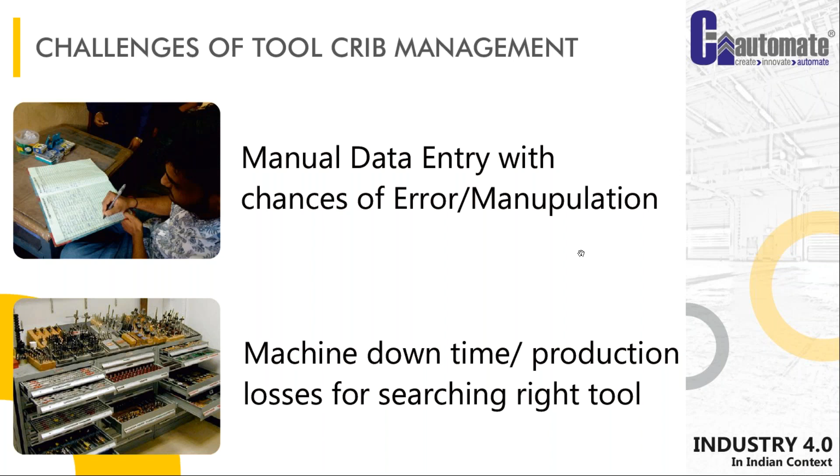The challenges of tool crib management, as we say, typically include manual data entry with chance of error and manipulation, machine downtime, and production losses from searching for the right tools. We come across this day to day—misplacement, theft of inserts and tools, unaccountability of used tools and inserts. It's almost like a second sale that usually happens. There's also tracking of used and overused inserts or tools. Today we are aware there's huge potential for reuse of inserts, but because we don't have a mechanism in place, typically we ignore this potential for saving a lot of money. Next is tracking of cost centers for each tool against the production done, because this again requires some systematic automatic tool which can capture this data, but we don't have it, and that always creates this challenge.

So usually, what are these challenges demanding? Does this mean we don't have any existing system in place? I don't say that. Every organization, small or big, has a system, but the challenging thing is always sustaining it. So the question becomes: what can help us sustain it? Sometimes we also ask whether defining a new system, considering the present cost-effective utilization of tools available today, will help us go to the next level.

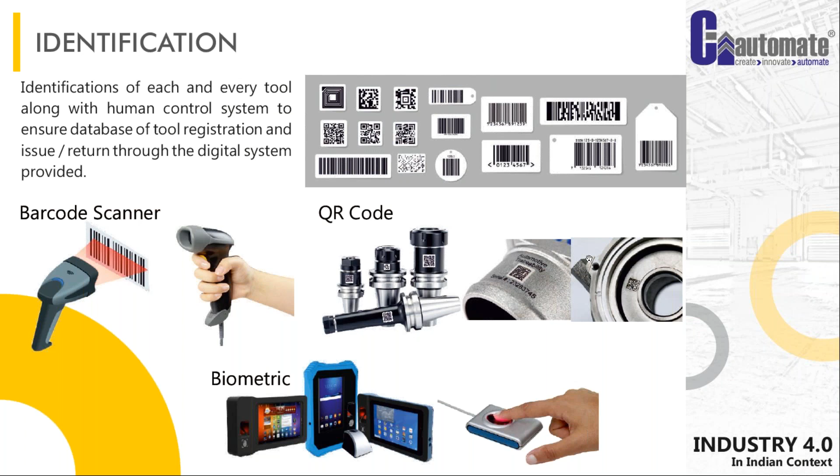And second, knowingly or unknowingly, all our team members down the line in any shop floor, whatever he has studied, he's aware of this scanning, because he's already using something like Paytm, he scans and pays the amount everywhere, so he's already educated for it. And that brings for us a huge potential to bring this technology in house without much consideration. Everyone has a smart mobile. Sometimes our shop floor people use it much better than us. That's what I've actually experienced. So it's just a matter of how we quickly adapt to the technology.

Traceability. This is one area where many of our machining industries, many of us hardcore mechanical people, somehow don't fall easily in love with software, and we then create a problem for ourselves. Here I would rather say that if we are able to have some tools which can be quickly interfaced to these QR codes, RFIDs, or whatever identification tools you call them, I think on that visibility we can have great feedback and bring that kind of accountability, because once we have this traceability, everything can be accounted for.

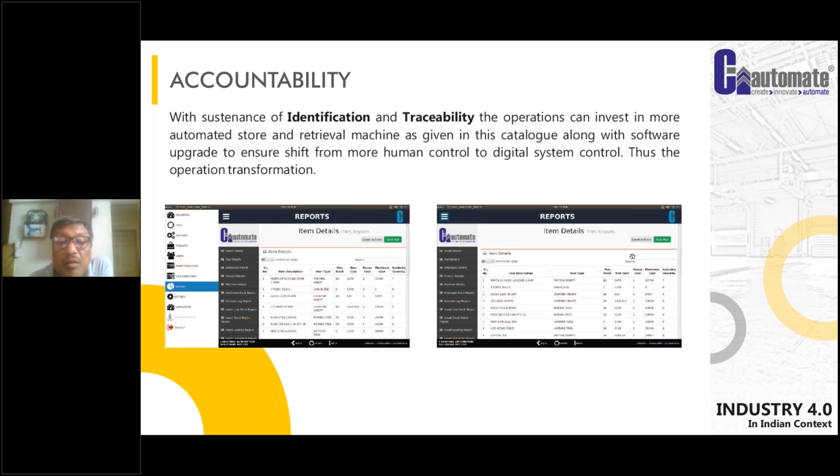So again, for this, our tools definitely give you all the reports, because we have tried to understand the pains of all the customers we have been interacting with, right from the market survey when we started this particular product design. And today we are very happy to see the maturity of our product and the reports, the software user interface that has come out. I really thank all our customers for their feedback on this.

So I would like to start from the simplest of the simplest, something which one can start immediately today, is cutting some barcodes, QR codes, printing, pasting it on the tools. We have these scanners which are readily available in the market. Just get a software tool, definitely which we provide. Of course, if there's someone else, no issues. But get that software tool interfaced with this and just start the use. This is as simple as plug and play.

And today I'm very proud that I will be giving you this free subscription as a trial, wherein you can play with this, wherein this identification, traceability, and accountability with the visibility and accountability software will be on your system. So here I have just shown how various tools kept openly can still be brought, interfaced with the software platform, and just start using it.

Okay, what you may have to best do is maybe have some kind of small fencing to your tools or that particular area, which can help you have a proper flow of the tool from the shop floor to your point of use.

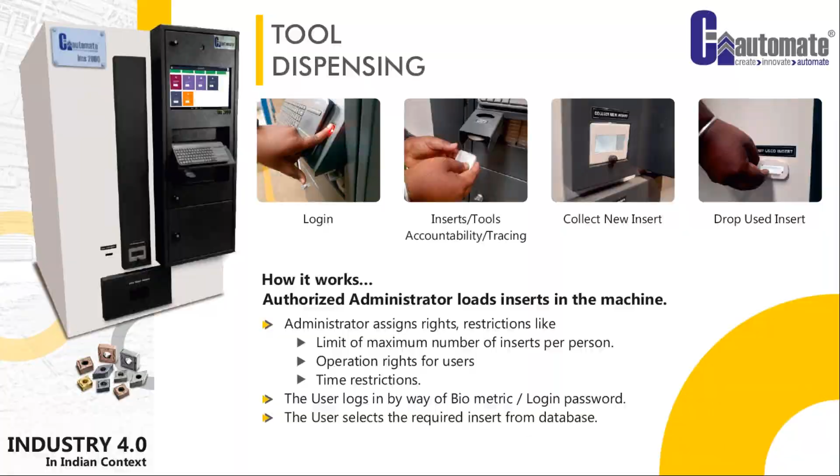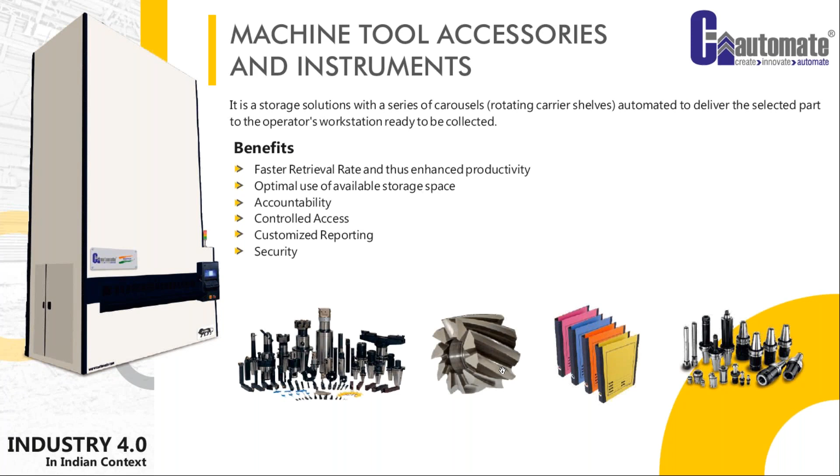And these features are incorporated in all our tools, wherein we speak of IMS, ITMS, where we are also speaking of the tools along with, we are also giving the files, cutters, you name it, you have them here. There's all the reports.

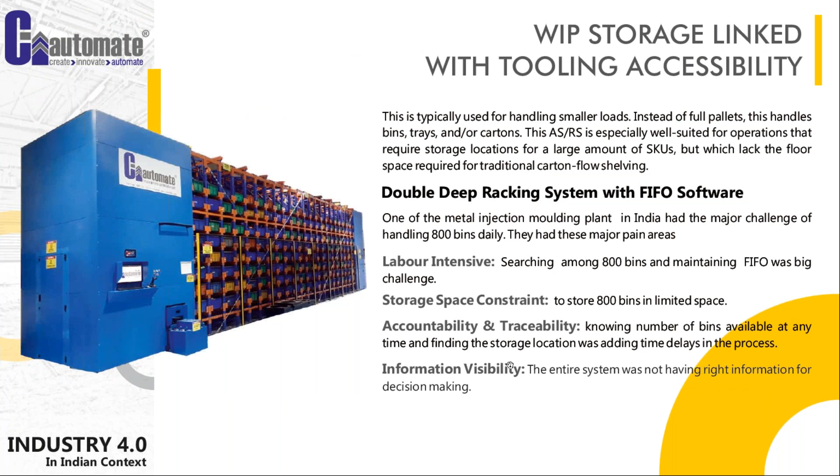What we have further done is we have also integrated the jobs. That is, we are speaking about work in progress jobs, where if you have an arrangement to place the jobs in a kind of automated storage and retrieval system, as soon as the machine calls for a particular job, this job is taken by an AGV. This is one project which we executed for Indo-Yamaha in Bangalore, so that even the workflow is integrated with the tool management system.

This is how we say it as a one-stop, one point solution. You speak of presetter data, machine data, CAD CAM data, ERP data - all this we are connecting on one platform. Our software, which we provide with our machine, gets interfaced to all of these entities or elements to make you feel that you are on a seamless platform.

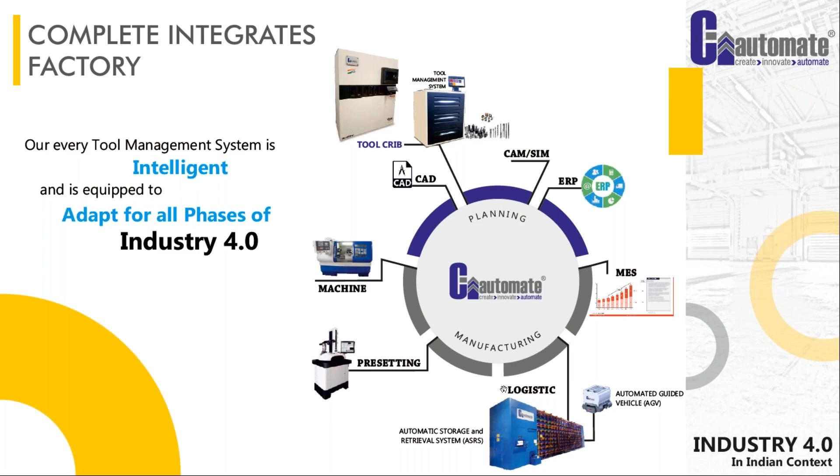So this is what we, as an industry 4.0 one-stop solution for total tool management, are able to do. Going further, this particular product has made us deliver today the complete warehousing solutions, because as we started giving the insert tool management, workflow, job flow management along with storage, we started giving the warehousing solutions, the AGV solutions, and the rail guided vehicle solutions. That's the reason we say we today are a one-stop solution for complete material handling.

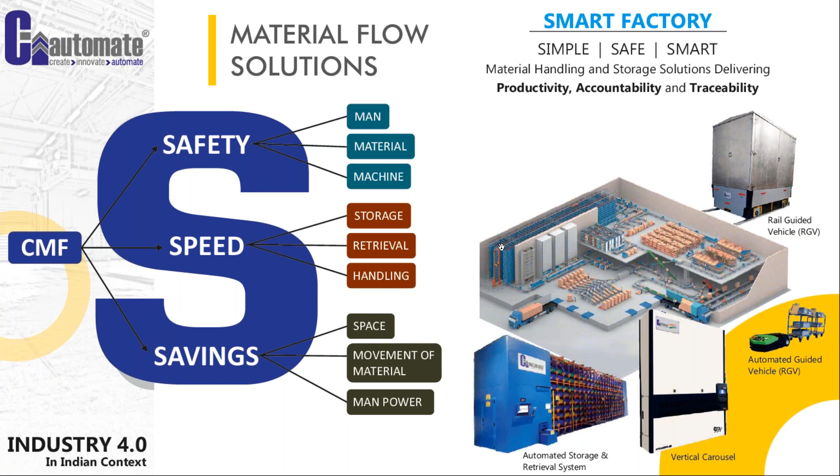Along with traceability, accountability, and visibility, when we speak of maximum profit, information flow and material flow are becoming the key. Unless we integrate, business will not be in control.

And that's where our ERP solutions, which we are calling our Creators Material Flow solutions, bring these features which can be loaded on our systems, on our machines, as well as on your premises, so that it interfaces with your ERP, if you want to pull and push the data in case you have difficulties with the existing ERP systems.

This is how we say total interface to the customer and vendors, planning, scheduling. And we speak of planning, scheduling of the total functions, not just production. We are giving planning, scheduling solutions for marketing, purchase, HR, quality, production, design, stores, accounts, and maintenance, so that the particular activities can be executed as per the plan.

A few companies we start from the production department and then conclude with the total integration of their functions.

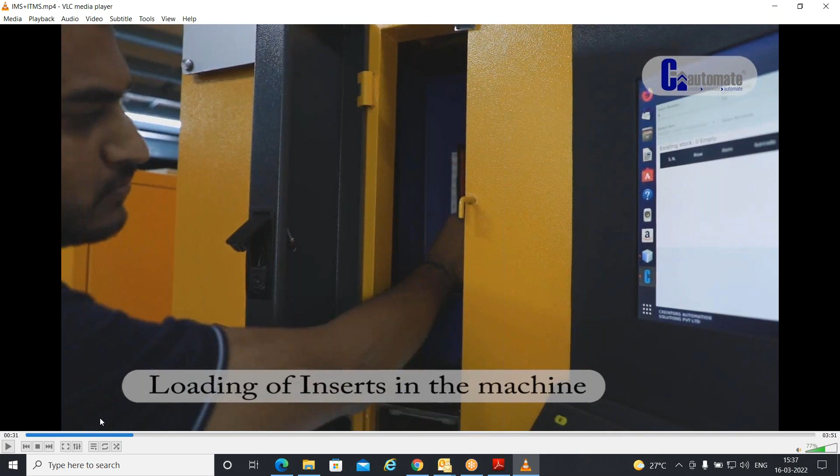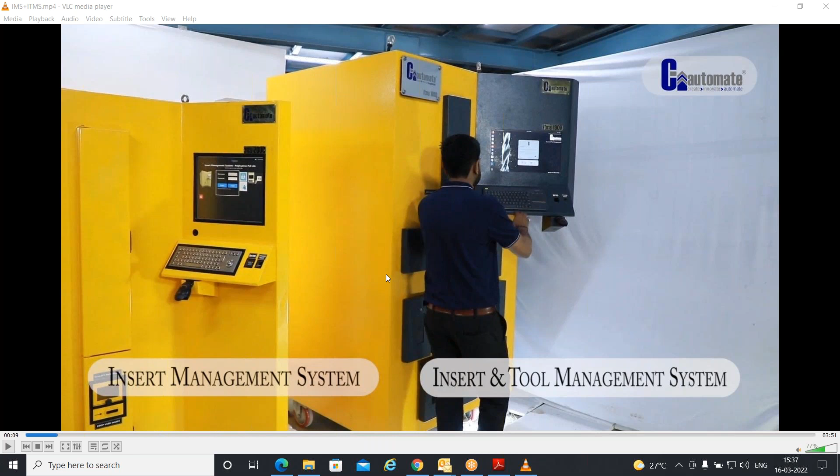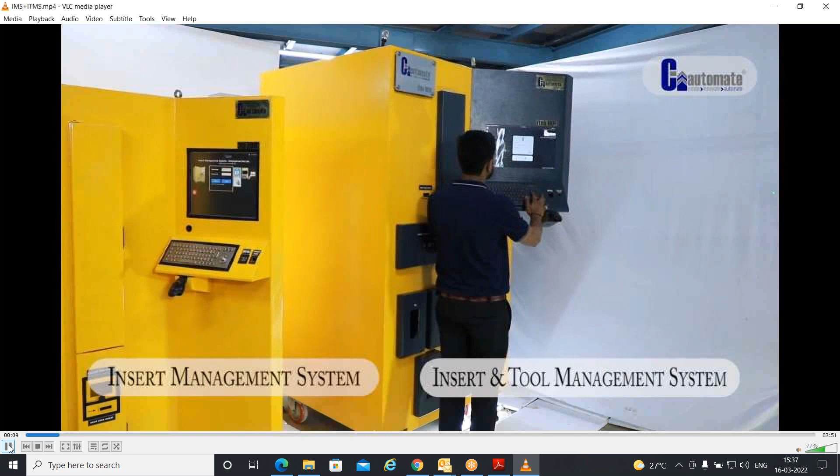This video showcases our products. So here you can see two machines. This is called our IMS. The bigger machine is called ITMS, that is Insert and Tool Management System, and the smaller machine is called Insert Management System, that is IMS 2000 - an intelligent system to control inventory for demanding production.

So here you can see the logins can be provided as per the requirement. Here we have fingerprint, RFID, or direct user ID login. In the Indian context, the greatest challenges our industry is facing are traceability and accountability.

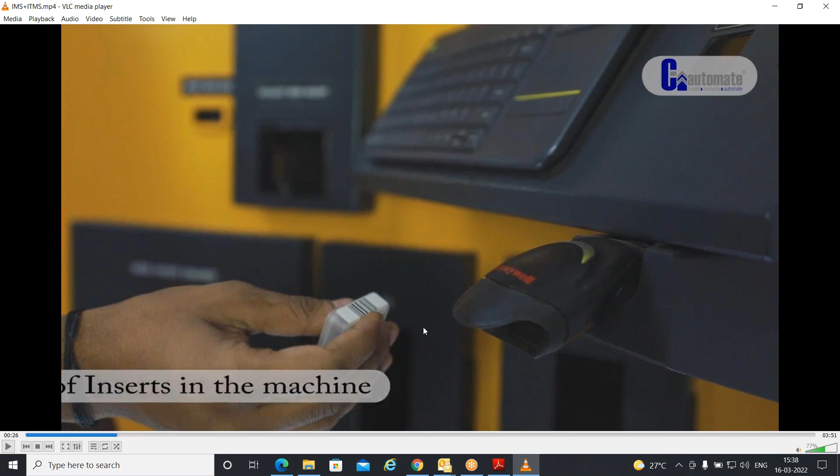So here, actually, I was trying to show you the insert box. This box has a barcode, which is an identification for that insert, which will be loaded inside the box. So the user has to first scan the box, and then he is able to load it inside the machine. Accountability, security.

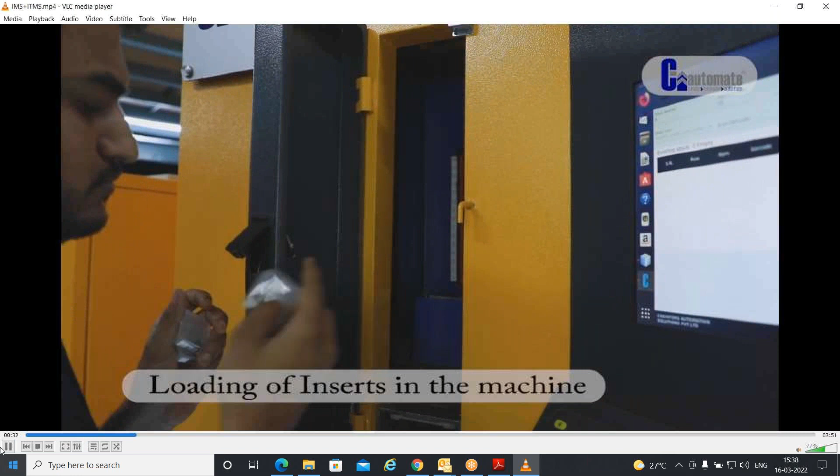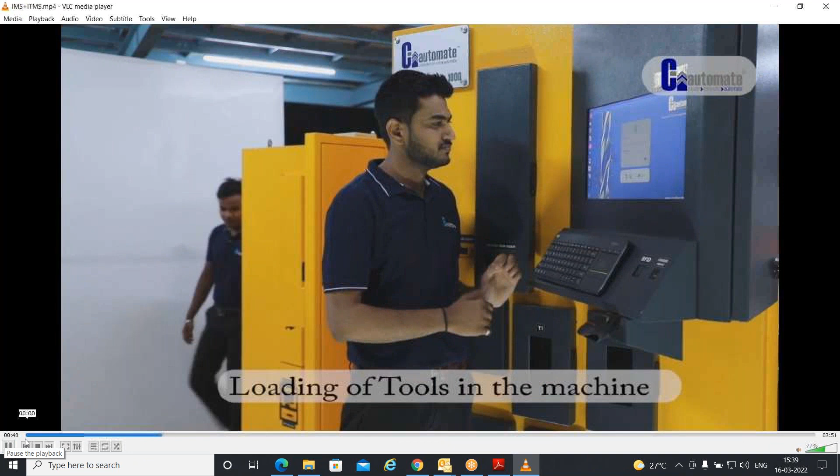These challenges cost a lot for any manufacturing unit. Here you can see the operator or the admin can place the boxes anywhere, at any position inside the machine, whereas the machine is going to decide - it can scan and find out at what location he has loaded the boxes. So we call it anywhere, like you can store it anywhere. And our products are an effort to address these issues and make the machining industries more profitable.

Every box that stocks the inserts or tools is identified by a unique barcode, which makes it easy to trace the inserts or tools at any point of time.

So here the operation shown is where an admin performs the first-time issue when the machine is given to any company. The admin has to first give the inserts to the operator. Now the admin has given the insert to the operator, and the box is loaded back to the machine.

One of our customers proudly mentioned that there is a 20% reduction in tooling cost for the same production when compared with the previous setup, after using our solution.

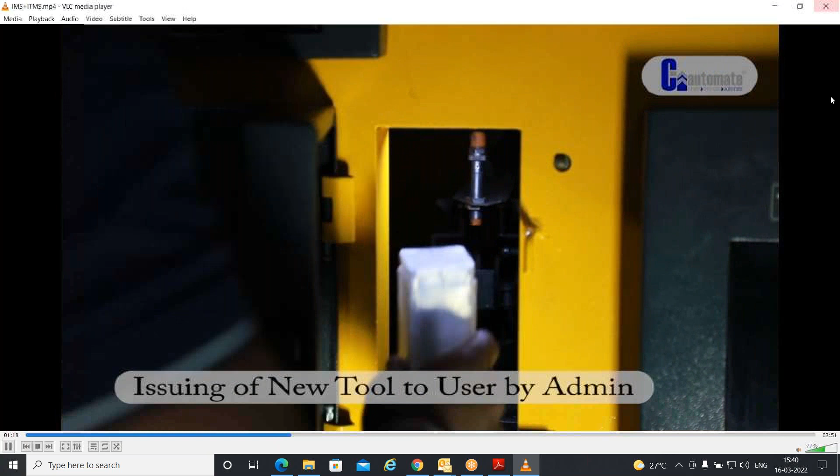Security of the inventory is assured by authorized access to the machine. Every insert and tool which is issued is tracked.

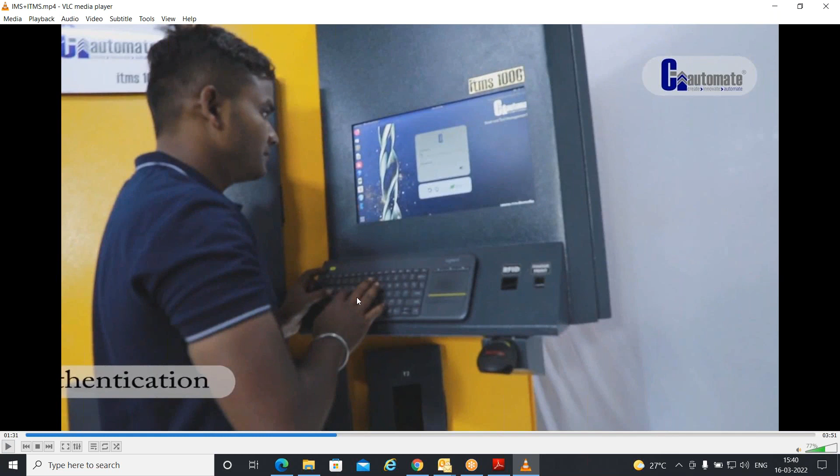Now here the operation is shown by the operator. When the operator comes, he logs in. As soon as he logs in, his first task is to replace the old insert which was previously given to him by the admin, and only then is he authorized to take the new one, which is collected back in the machine. This ensures that the tools are utilized to their full capacity and efficiency.

Our product removes the uncertainties from stock levels through continuous online monitoring. So here, in case the operator does not drop the insert but drops only an empty box, the system immediately produces an alarm and the user is blocked from further operations. In that way, it takes care of the issue, and a report is sent to the admin saying that this user has performed this action.

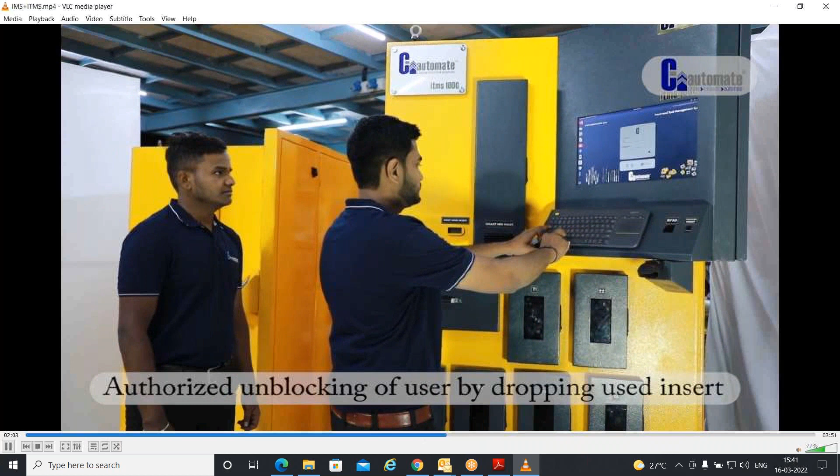The system generates reports to keep you informed of the stock level and its usage. It has the capability to generate automatic orders to ensure an optimum level of inventory is always maintained. Now, in case such an issue occurs, the admin comes into the picture and has to replace the insert which the operator was supposed to replace in the previous operation.

Creators is now offering an end-to-end Industry 4.0 enabled solution where the CNC machine, the tool presetter, and other storage devices of any kind can be integrated.

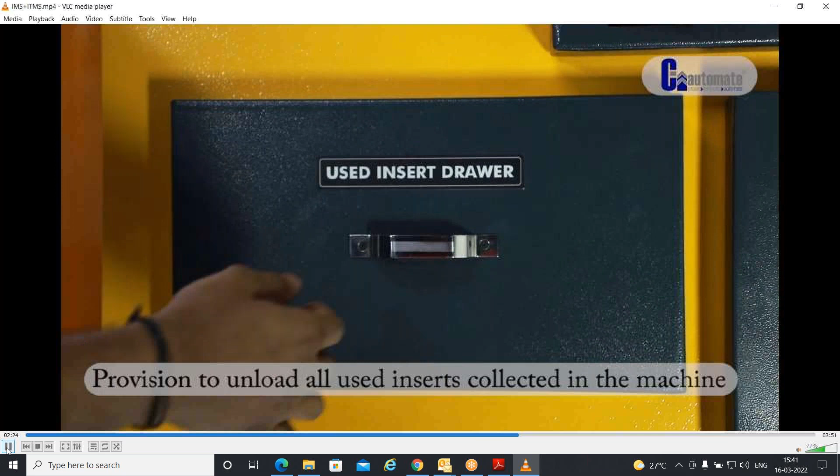This is a drawer provided in the machine, where the boxes collected from the operator, the inserts thrown back into the machine, are gathered. The admin can take out this drawer, and the inserts can be scrapped or resharpened based on their usage.

In case of any doubt about an insert, the admin can directly scan the barcode of the box. It gives the complete history of who has used this box and these inserts, at what time they were replaced, and all other details. Accordingly, the admin can take the appropriate action.

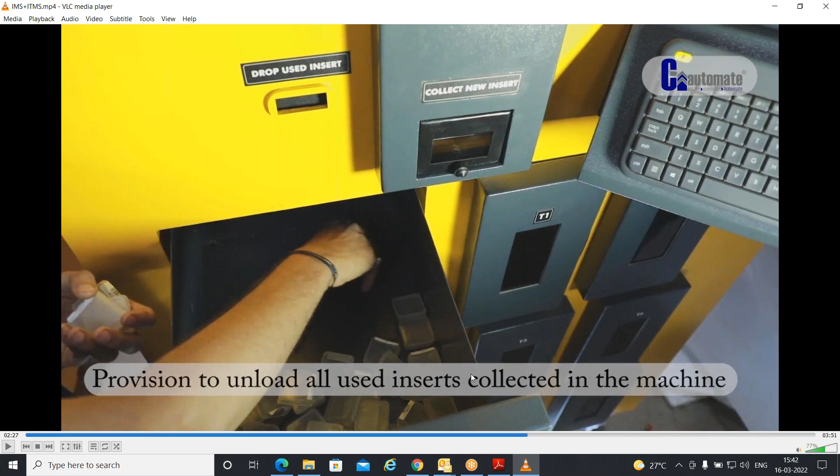These devices can be integrated, by which complete tool management control is achieved. This is possible only with a holistic approach and teamwork.

You can also see the reports showing some colors. These colors indicate the level of availability in the machine. Red indicates that they have already gone below the minimum level. Yellow indicates they are at par with the minimum level. Black or gray indicates that they are higher than the prescribed inventory. This color coding always helps the admin make decisions.

For our customers, every solution that we offer is unique in itself.

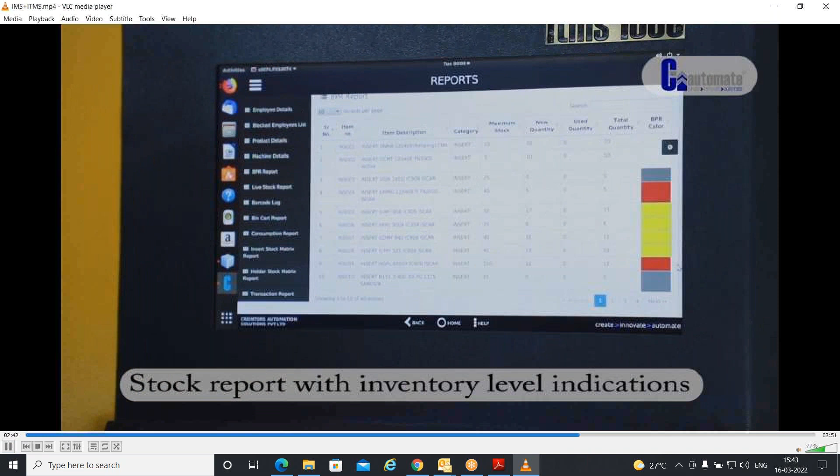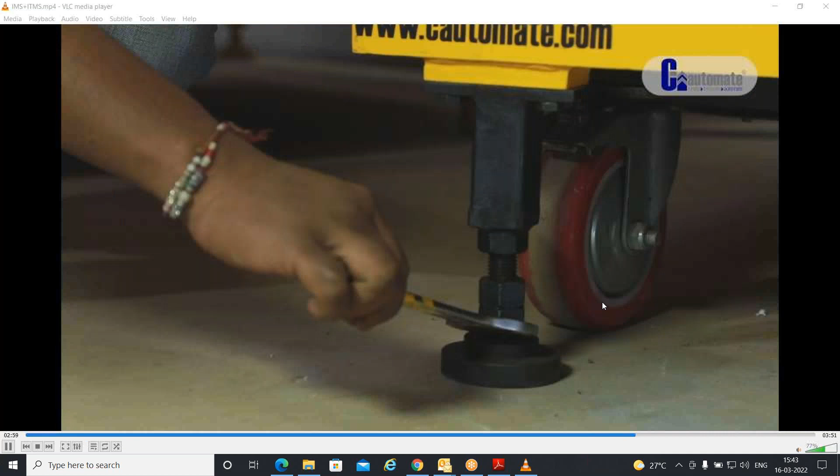All these reports and procedures are applicable for both inserts as well as tools. Both are identified by the barcodes on the box, and the method remains the same.

Here we are showing how this handles any problem.

A few awards worth mentioning: Creators received a second prize in productivity and innovation from the National Productivity Council of India in 2014-15 for the product Insert Management System. Additionally, Creators has been awarded as one of the top 25 innovative companies in India by CII in 2018. So come, let's work together to make your manufacturing unit more profitable.